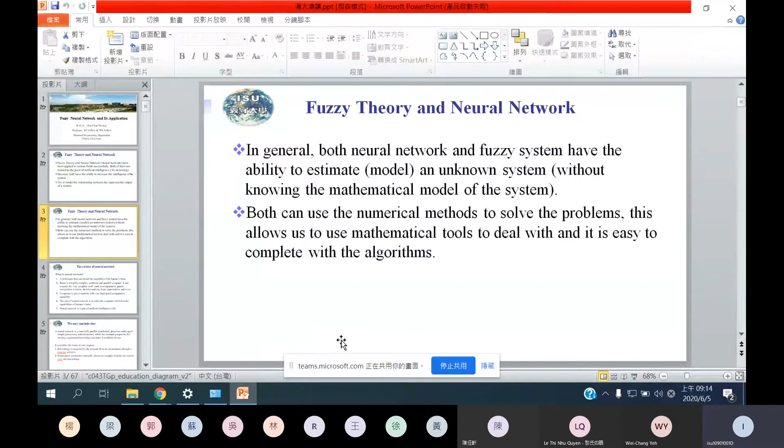Okay, let's take a review of neural network. So what is neural network? Neural network, in Chinese we call 神经网络. It's a technology that can model the capability of the human brain. Why? Because we all know the human brain is a highly complex, nonlinear, and parallel computer. It can execute very complex work, such as computation, pattern recognition, or we say computer vision, or decision making, or logic organization, and a lot more. However, the machine computer is just a machine with very high speed computation capability. It has no ability like pattern recognition, or decision making, or logic organization.

So that's why we say the aim of the neural network is to make the computer have the capabilities of the human brain. And of course, we all know now neural network is a part of AI technology. So we may conclude that a neural network is a massively parallel distributed processor made up of simple processing units. The processing units usually we call neurons. In Chinese, we say 神经元, which has a natural propensity for storing experiential knowledge and making it available for use. So it resembles the brain in two respects. The first one is that the knowledge is acquired by the network from its environment through a learning process. And then interneuron connection strengths, sometimes known as synaptic weights, or we just simply say weights, are used to store the knowledge we obtain.

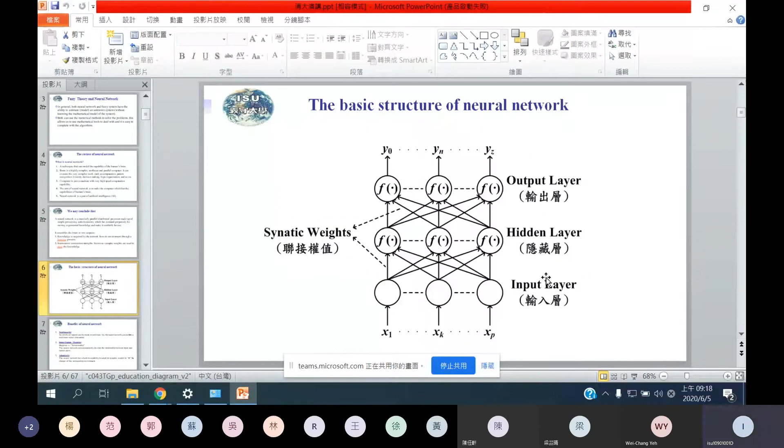So we said benefits of neural network. So how many benefits are there about neural network? Here we conclude, the first one is non-linearity. We say an artificial neuron can be linear or nonlinear. So the neural network can perform nonlinear signal processing. And the second, the neural model can do input and output mapping. Mapping means finding a relationship between the input and output pairs of the data.

So we say the neural network can automatically develop relationships between input and output pairs. And the third one is adaptivity. That means the neural network has a built-in capability to adapt its weights to fit the change of the surrounding environment.

The next one is called fault tolerance. The neural model, if it is implemented in hardware form, we say it has the potential to be inherently fault tolerant in its performance, because, like we just mentioned, knowledge is distributed equally in the weights. Therefore, the neural model still can perform well, even if some damage happens in the neuron or its connections. So that's why we say the neural model has a higher fault tolerance.

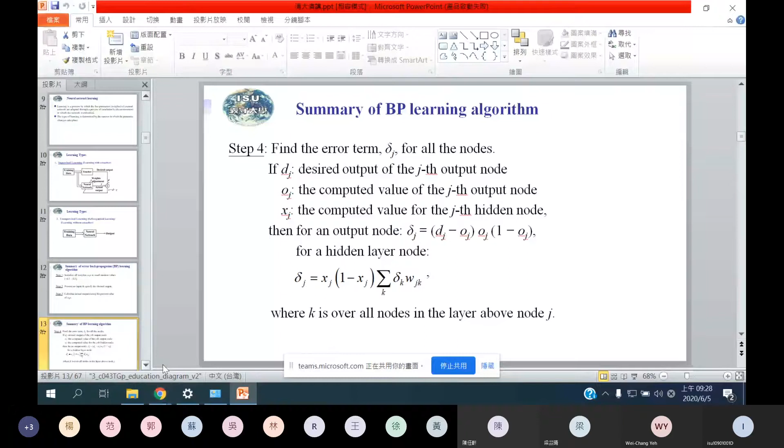Then we adjust the neural weights using this formula. The omega ij of n plus 1, that is the next weight, is the present weight omega ij of n, plus alpha delta j yj, plus eta times omega ij of n minus omega ij of n minus 1. Here n plus 1, n, and n minus 1 index the next, present, and previous weights respectively. Next, step 6 is to present another input and go back to step 2. That means we send the data in the training data set one by one.

Suppose, for example, we have 10 pairs of input and output data in the data set. From the first input-output pair to the 10th, when we finish these 10 data, that means we have done one round of learning, or usually we say one epoch. But how many epochs do we have to take for the neural model? It depends on how complex or how nonlinear the training data is. So the content above is about neural networks. Is it okay for all of you? Do you understand? Okay.

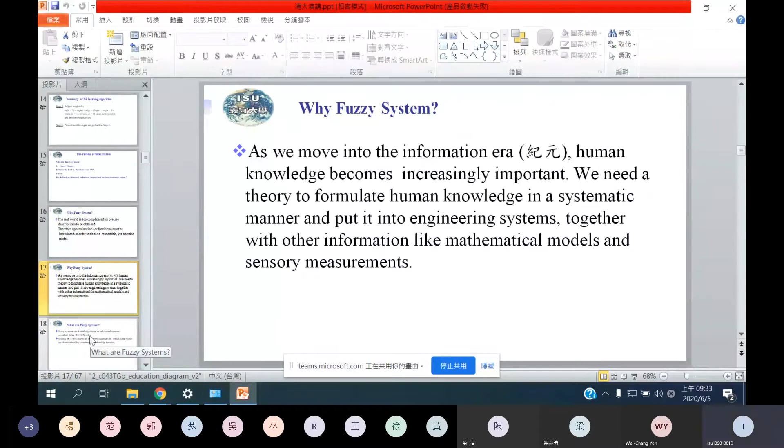So if you have the experience, like working in a factory, I do believe you all heard about expert experience. So sometimes you ask someone who is a senior engineer, why did you want to do this? He will tell you, oh, you just follow my way or something like that. He cannot explain its way very clearly or use a mathematical model to tell you why. So that means such kind of knowledge is based on experience.

So this is the concept of the fuzzy system we're going to use. So we say usually fuzzy systems are knowledge-based or rule-based systems. We call them fuzzy if-then rules. So what's meant by if-then rules? That means if A is what, then B is what, something like that.

So we say fuzzy if-then rules is an if-then statement in which some words are characterized by continuous membership function.

So the starting point of constructing a fuzzy system is to obtain a collection of fuzzy if-then rules from human experts or based on domain knowledge. So the collection of fuzzy if-then rules, then usually we create the rule base. Then we combine these rules into a single system. It's called a rule-based system. Different fuzzy systems use different principles for these combinations.

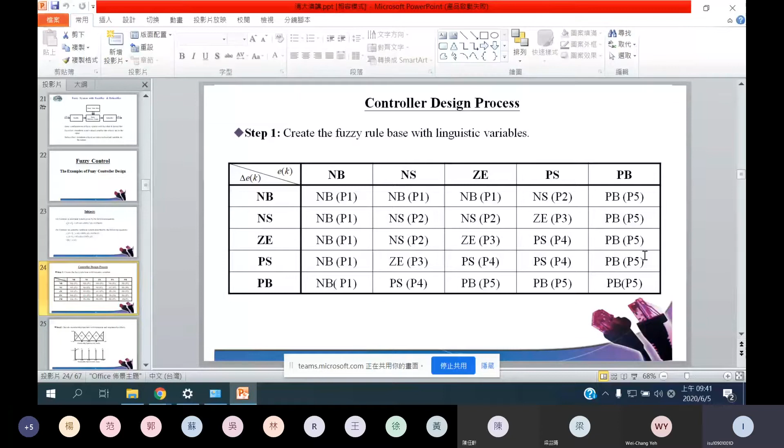In this table, you can see there are 25 rules. For example, suppose if error is negative big and the error change is negative big, then the force is negative big. For example, if error is zero and the error change is negative small, then the force we use is negative small force. Actually, this rule base is usually created by the experts. However, in the control area, this rule table is very standard. It's the most popular one used by the control researchers.

So here you can see now we just set the membership function. For example, suppose at the beginning we don't know what kind of membership function is the best for the controller. So we just use a very simple triangular membership function for the error and error change. For these examples, we use the same membership function for the error and error change, and the value is from -1 to 1. And for the U of k, the defuzzifier, here we use the singleton membership function. So no matter whether it's U of k or delta U of k, here you can see negative big, negative small, zero, positive small, positive big. However, here we use P1, P2, P3, P4, P5 to represent these 5 conditions, and the value is -10 to 10. The minus means negative force. The plus 10 is positive. The positive values mean use the positive force.

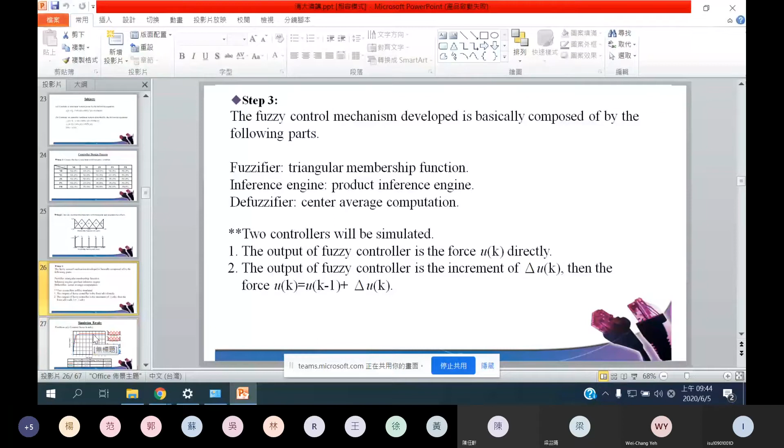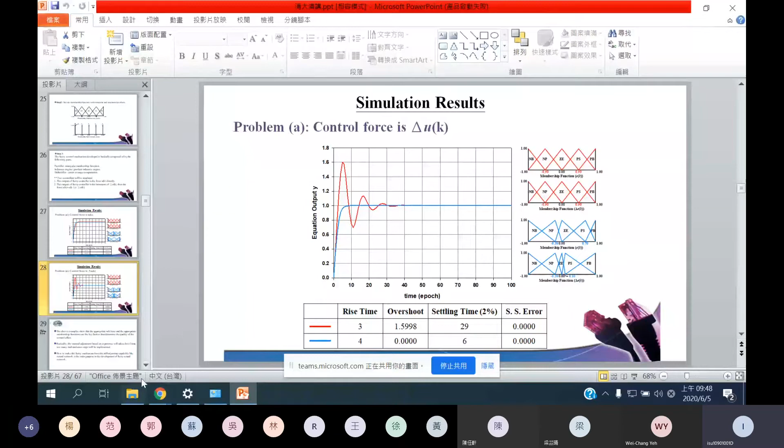So here we say the above example just shows that an appropriate rule base and appropriate membership functions are the key factors that determine the quality of the controller effect. However, just like what I said, manual adjustment based on experience will take a lot of time. Too many trial and error steps will be taken.

So we say, suppose the fuzzy mechanism has a self-tuning ability, that means if we make the fuzzy mechanism have AI technology, it can do self-adjustment of the membership functions. Then we don't need to spend a lot of time tuning the parameters of the fuzzy mechanism. Just let it do the self-tuning, and the controller performance will be excellent. That's why we ask how to make the fuzzy mechanism have self-adjusting capability like a neural model. This is the main purpose of the development of fuzzy neural network, and also the title of this speech: fuzzy neural network.

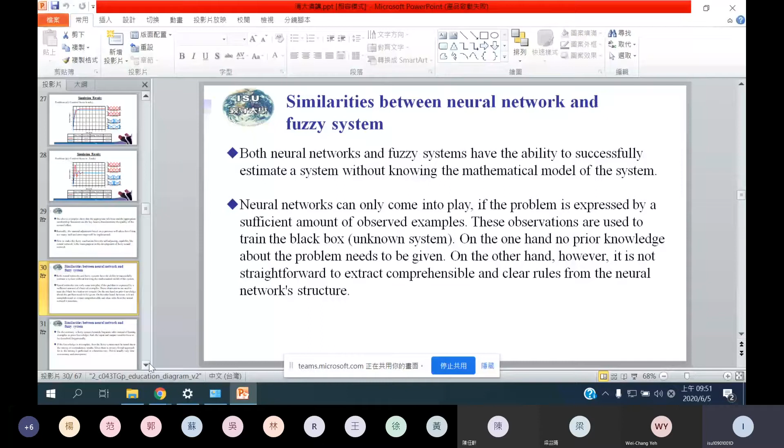On the contrary, a fuzzy system demands linguistic rules instead of learning examples as prior knowledge, and the input and output variables have to be described linguistically. So you can see the fuzzy rule base is just like the neural weights. How to make the rule base adjustable by a learning process, making a fuzzy system like the neural network, is the purpose of the fuzzy neural network technology.

Next, if the knowledge is incomplete, then the fuzzy system must be tuned due to wrong or contradictory results, since there is no formal approach for it. The tuning is performed in heuristic ways. This is usually very time-consuming and error-prone. Like what I said, if you want to change the rule base, because the rule base is usually described in heuristic ways, you have to have lots of experience in control design, and such tuning takes a lot of time. You have to try, make errors, and try again. So lots of trial and error will be taken.

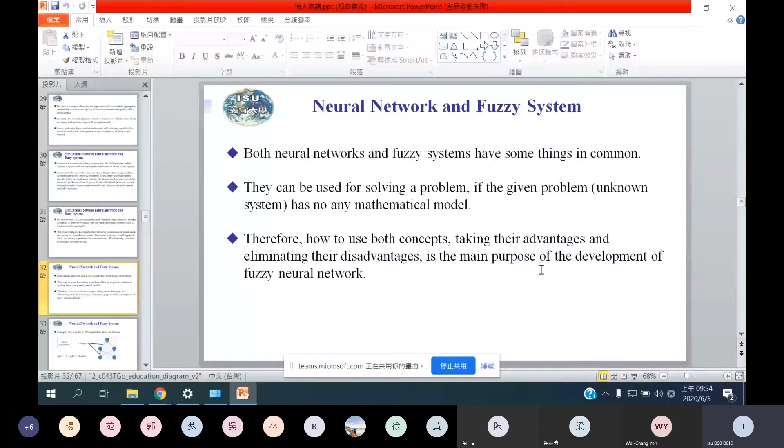So here, let me give you a simple one. We say in the neural model, the learning process is to find the proper weights to make the neural network fit the surrounding environment, or we say to fit the model of the trained data. Usually in the learning process, we make a lot of weight adjustments, like I showed you in the error back propagation learning algorithm. So we say the increment of weights, delta omega ij of n.

However, you can see for this part, because in the neural model we use the back propagation learning algorithm, we just send the error layer by layer to adjust the weights. Here we just use the error. So now we suppose we can create a fuzzy mechanism, using the error and the error change to make a fuzzy system to be like a weight tuning mechanism. So that means this increment of weights is generated by the fuzzy mechanism.

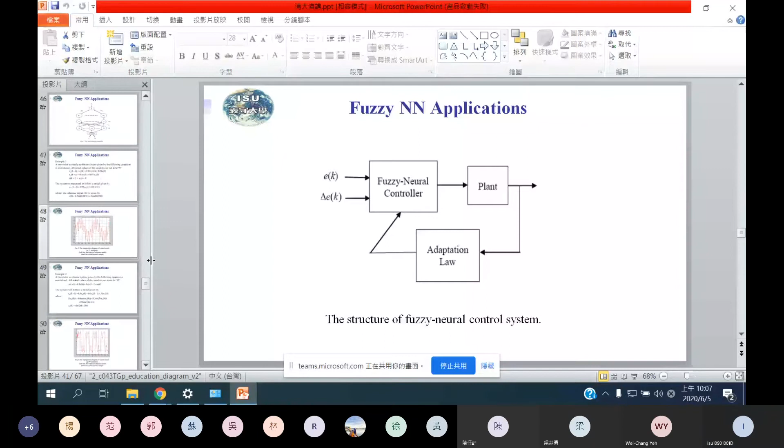In this example, in order to speed up the reaction of the fuzzy neural controller, in this application I show you, we only use nine rules. So only nine rules are taken to construct the rule table. The membership functions of the fuzzifier for the error term and error change term, and the defuzzifier for the force increment, are shown in the following table and figures.

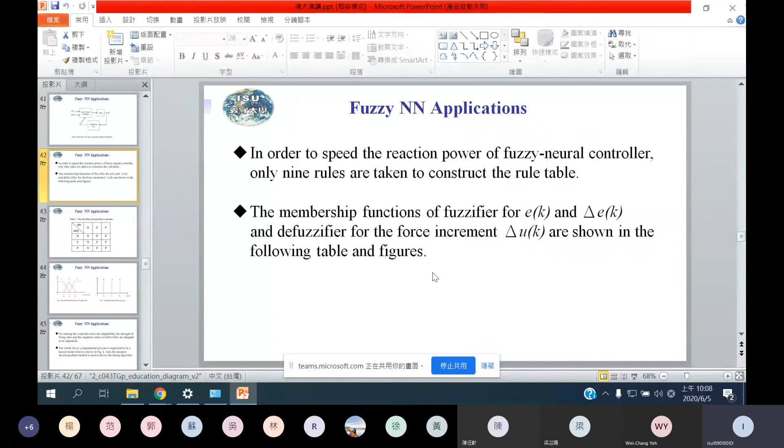That means, unlike a traditional fuzzy controller, which usually uses 25 rules in the rule base table, here I just use, for the error term, negative, 0, and positive. The error change also uses negative, 0, and positive. So the force we use also has only 9 rules in the rule base.

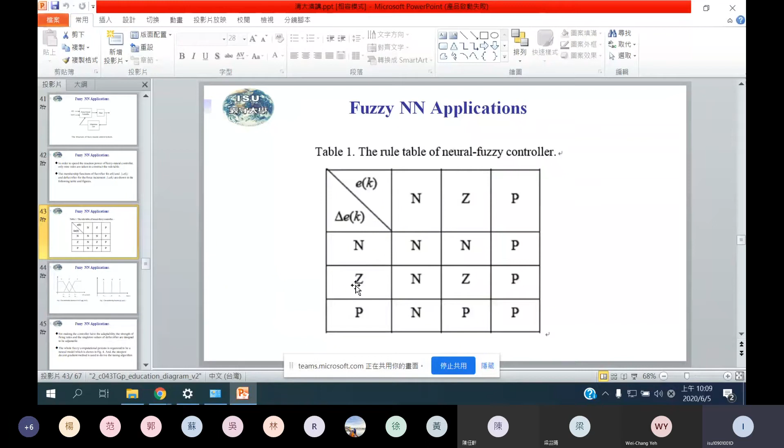Here you can see, suppose error is negative and delta error is negative, then the force we use is negative force. If the error is positive and the error change is 0, that means the force we are going to use is positive force. So this is the membership function we designed for the error e(k) and the delta error, and for the force, we use negative force.

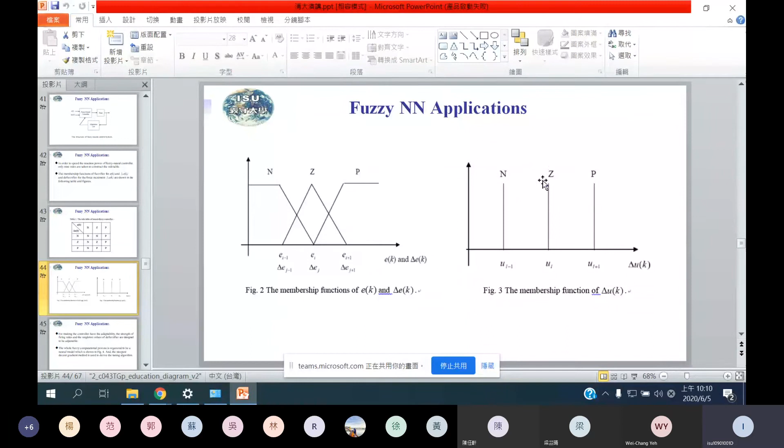For example, compared with the previous example here, we use -10, 0, and u(i+1) is +10. So negative force, 0, and positive force. At the beginning, we simply use such very standard membership functions for the fuzzifier, and the singleton membership function for the defuzzifier.

So here we say, for making the controller have adaptability, the strength of firing rules, that means the rule base. The rules are in the rule base. So the strength of the rules firing and the singleton values of the defuzzifier are designed to be adjustable. Both of these can be adjusted based on the controller performance, the control error. So the whole fuzzy computational process is organized to be a neural model.

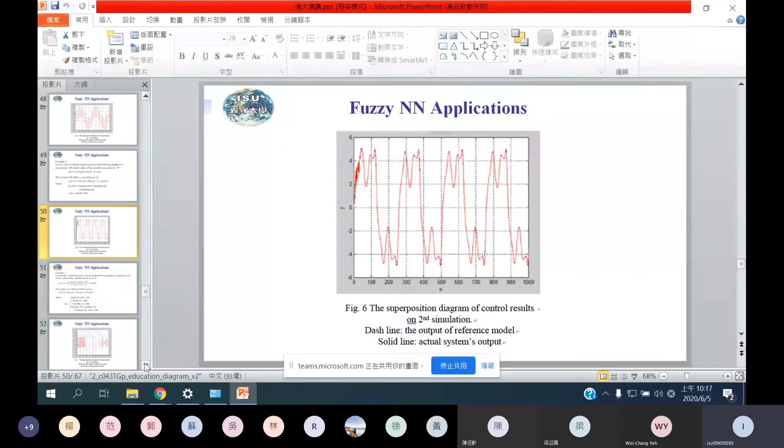Again, next one is the superposition diagram of the control result on the third simulation. The dashed line is the output of the reference model, and the solid line is the actual system output. So you can see the fuzzy controller can also control the system to follow the reference output very well. So in the first application, I just showed you the fuzzy neural controller controlling the nonlinear system to follow the reference model.

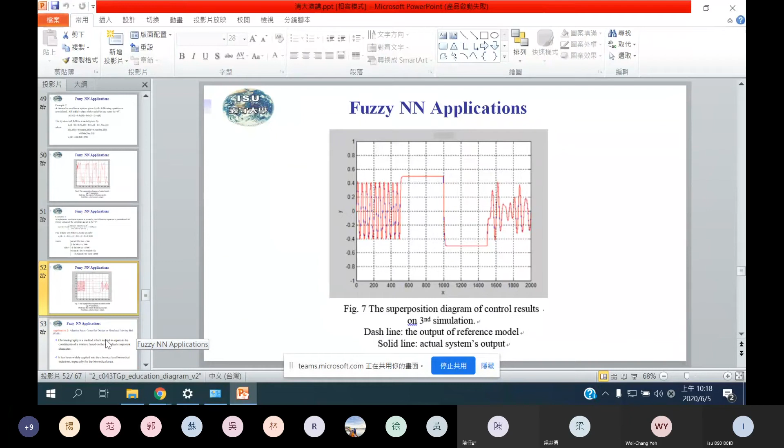Now let me show you application 2. The title of application 2 is Adaptive Fuzzy Controller Design on Simulated Moving Bed. What does simulated moving bed mean? Simulated moving bed in Chinese, we call it 模拟移动床. What's the purpose of the simulated moving bed? 所以模拟移动床的目的是在哪里? Okay, let's see.

Chromatography is a method used to separate the constituents of a mixture based on the individual components' character. Actually, SMB has been widely applied in chemical and biomedical industries, especially the biomedical area. Here I might explain this part in Chinese to all of you. Chromatography 就是我们叫做晨曦分离。晨曦分离事实上就是用来分离化合物或者是混合物的一个工具。它可以把两种混合物分离起来，然后呢把它分离出来。这个我们叫做晨曦分离。

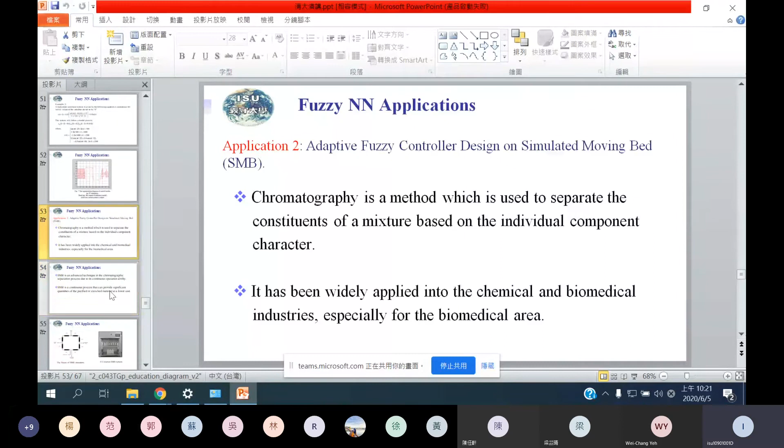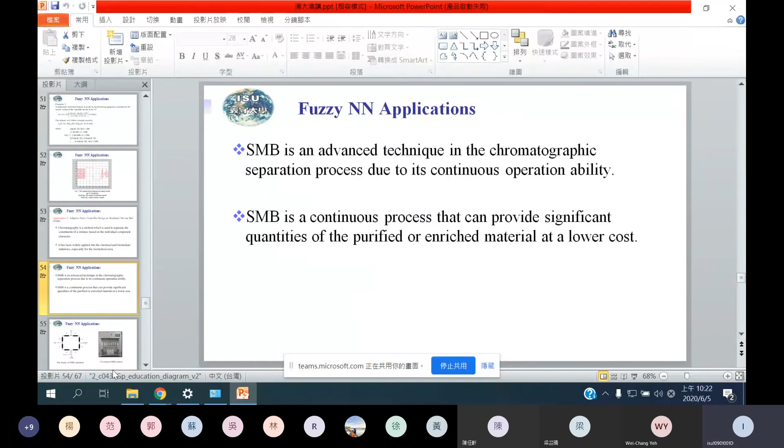So the simulated moving bed has become an advanced technique in the chromatographic separation process due to its continuous operation abilities. That also means SMB is a continuous process that can provide significant quantities of the purified or enriched material at a low cost. So that means 如果我们用这个连续性的 moving bed， 就是模拟移动床，因为它已经变成一种连续操作的一个晨曦分离的方法，所以它可以产生大量的，也就是在晨曦分离的量上面可以增加，而且呢，它因为用的水跟这个吸附剂比较少，所以它可以在一个比较低成本的方式之下操作。

So here, for example, we have 8 columns. 一个 column 就是一个试管 for example. This is the picture for the 8 columns SMB system. At this part we feed a mixture with 2 materials A and B here, and then we have raffinate B plus D, and over here we can extract A plus D. Then we control the 8 columns to move like a circle, to make it a continuous process.

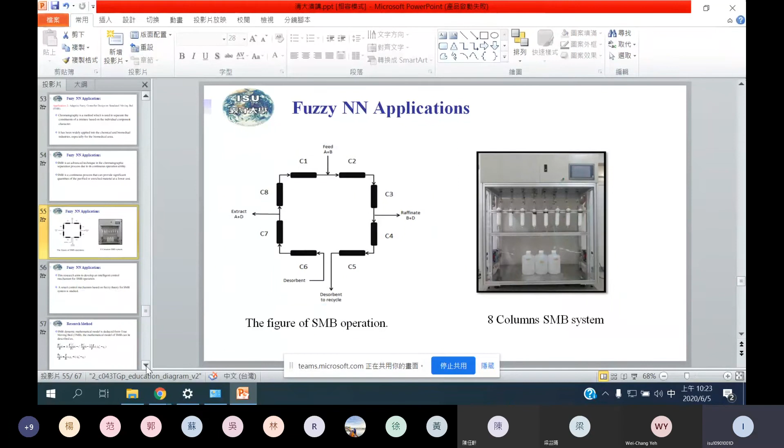Actually, this research aims to develop an intelligent control mechanism for simulated moving bed operations. A smart control mechanism based on fuzzy theory for the SMB system is studied. The SMB dynamic mathematical model is deduced from the true moving bed. The mathematical model of SMB can be described by at least two partial differential equations. Because these two partial differential equations are nonlinear, it's very hard, probably impossible, to solve these equations. That means the clear model of the SMB system is impossible to obtain. So we cannot use the traditional controller to control the SMB model, because the real model of SMB cannot be derived or obtained.

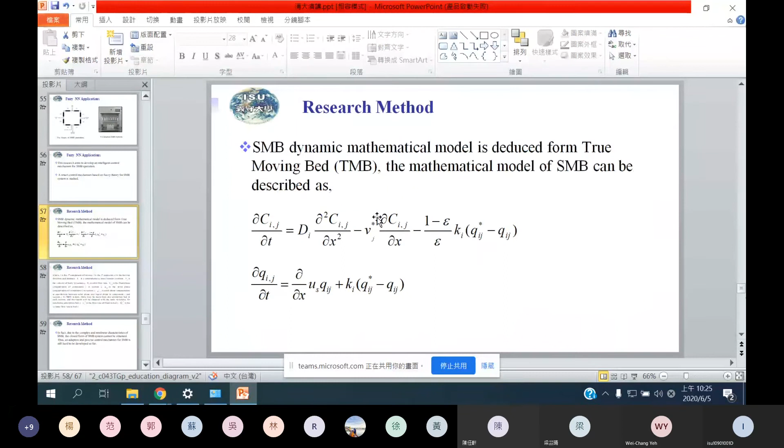This page just shows you some definitions of the symbols and indexes for these two equations. I don't need to explain each variable to all of you. For example, I is the components of the mixture, J is the J-th segment, and X is the moving direction and distance, something like that. I don't need to explain it to you one by one. You can just read it by yourself.

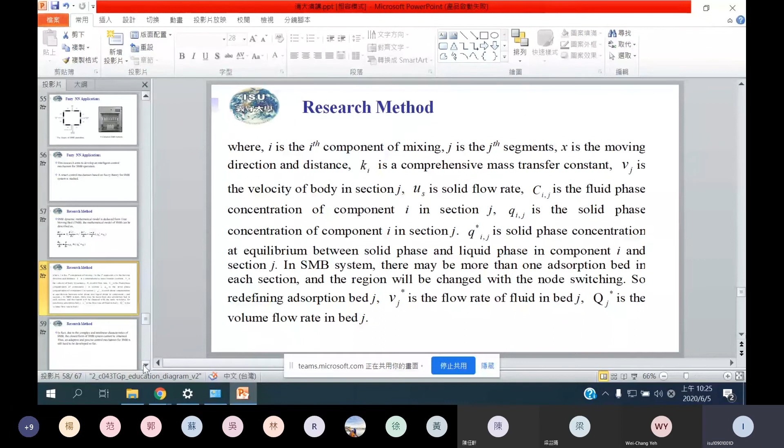So just like what I said, due to the complex and nonlinear characteristics of the simulated moving bed, the closed form of the SMB system cannot be obtained. Therefore, an adaptive and precise control mechanism for SMB is still hard to develop so far. So how do you design a controller to control the SMB system well?

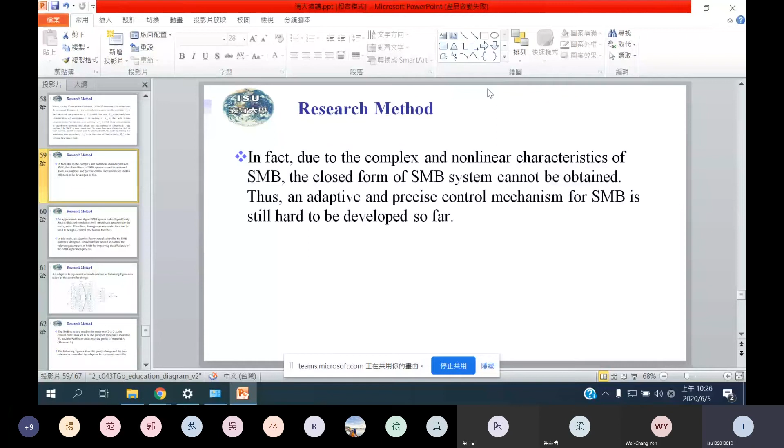Is the aim of this research. In this research, we take an approximate approach: a digital SMB system is developed first. We use numerical ways to derive the approximate model of the SMB system. Such a digitalized simulation SMB system can approximate the real system. Therefore, this approximate model can be used to design the control mechanism for the SMB system.

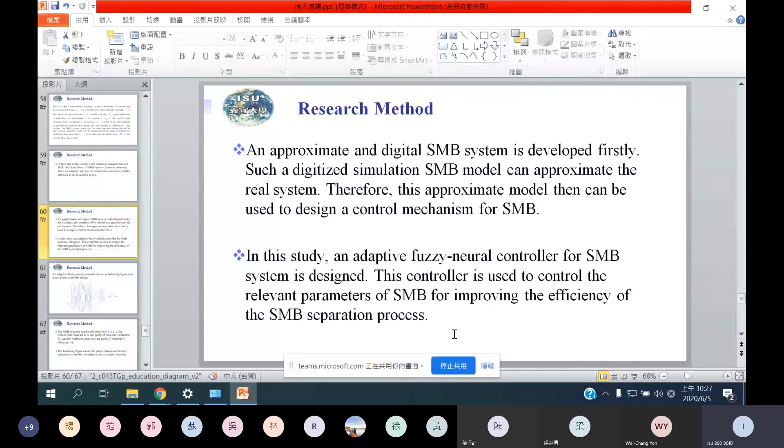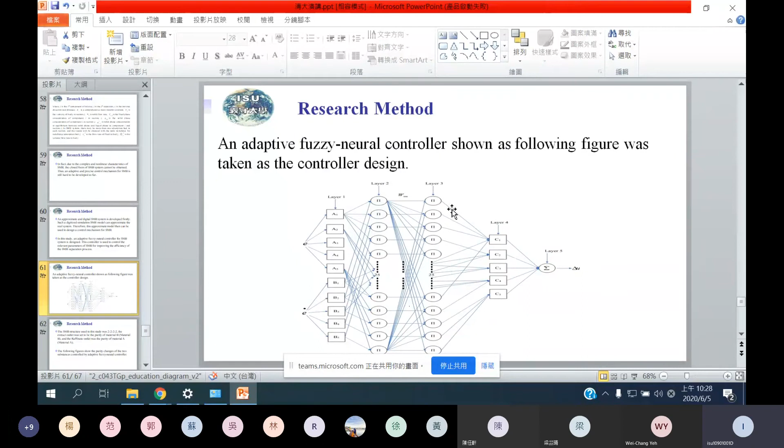Then in this study, the SMB structure used was 2, 2, 2, 2. That means we have 4 sections and 8 columns. In each section, we have 2 columns. The extract outlet was set to be the purity of material B, and the raffinate outlet was the purity of material A. So we have to separate a mixture with 2 materials, A and B. The following figures show the purity changes of the 2 substances controlled by the adaptive fuzzy neural controller.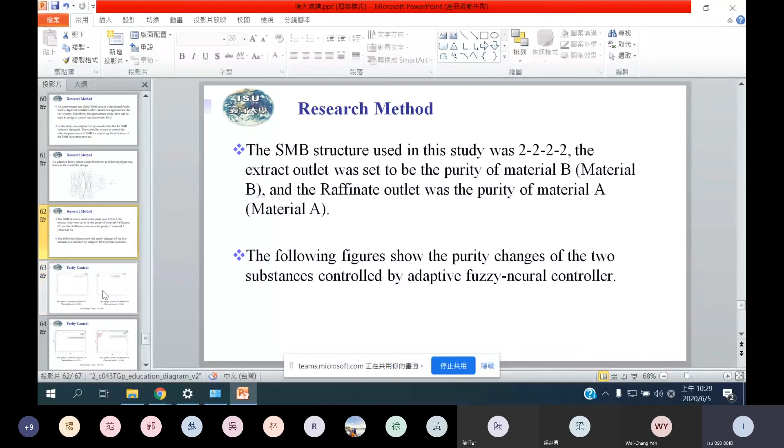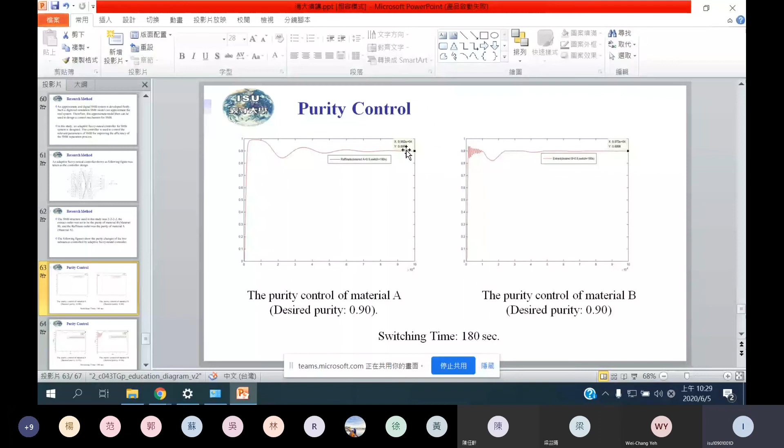In the first control result, suppose we design the desired purity of material A to be 0.9. Then the fuzzy controller can control the SMB to get a purity of material A of about, let's make it bigger so you can see, 0.8966. It's almost 0.9. And if the desired purity for material B is 0.9, we can see the fuzzy neural control can control the SMB to get a purity of B of 0.898. So it's very close to 0.9.

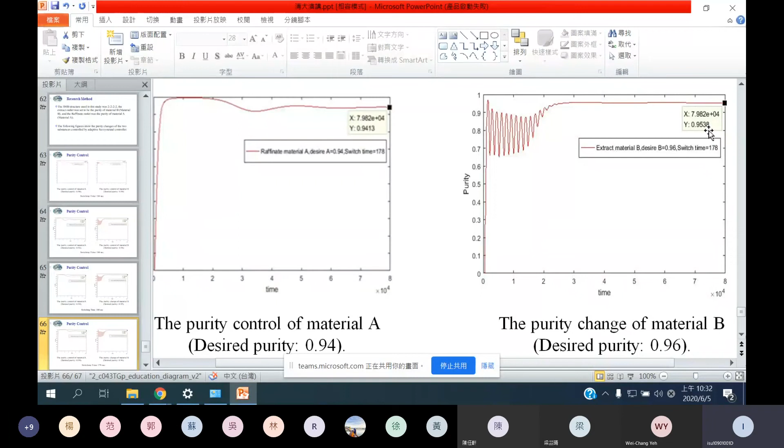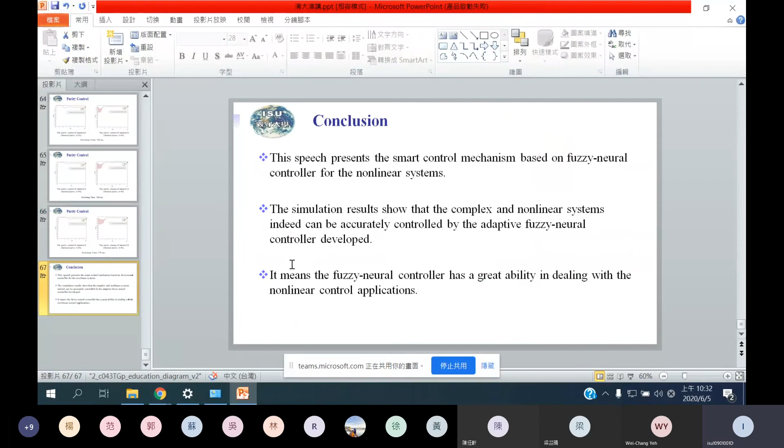So here we conclude that this research presents the smart control mechanism based on a fuzzy neural controller for the nonlinear system. From the simulation results, we can say the complex system indeed can be controlled by the adaptive fuzzy neural controller. It means the fuzzy neural controller has a great ability in dealing with nonlinear control applications. Actually, the fuzzy neural controller indeed has a great potential in real industry applications. Okay, my talk is finished here.